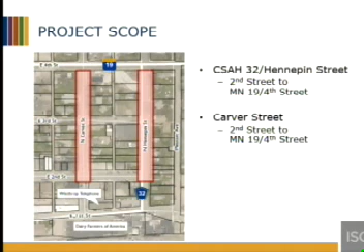So the scope of the project is essentially Hennepin Street, which is also State Aid Highway 32, from 2nd Street to Minnesota State Highway 19, which is also 4th Street, and Carver Street between the same two streets, from 2nd Street to 4th Street.

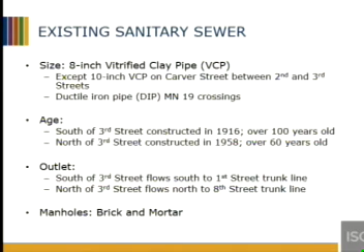The existing sanitary sewer is all 8-inch vitrified clay pipe, or VCP, except for one block which is 10-inch VCP. The existing crossings of Highway 19 are ductile iron pipe. It's split into two different systems: the north half, north of 3rd Street, is over 60 years old and drains north to the 8th Street trunk line. The area south of 3rd Street is over 100 years old and flows down south to the 1st Street trunk line. The existing manholes are all brick and mortar construction.

The city did have televising of the sanitary sewer completed in 2014 and 2015, mainly for two reasons: to identify sources of inflow and infiltration. Inflow is clear water entering the system through a direct connection, such as a perimeter tile or a sump pump going directly to the sanitary sewer. Infiltration is groundwater seeping in through cracks, leaky manholes, or things of that nature.

The idea is that they want to find out where those clear water sources are coming from, because they increase demand on both the system of pipes itself and the treatment facility. In addition to identifying those sources, they also wanted to identify any defects in the pipe that might cause failure in the system at some point.

For Hennepin Street, the worst defects found were unlikely to fail for at least 20 years. For Carver Street, there was one defect that inspectors felt might fail within 5 years, two defects that may fail within 10 to 20 years, and the remaining were unlikely to fail for at least 20 years.

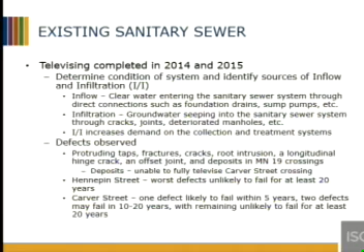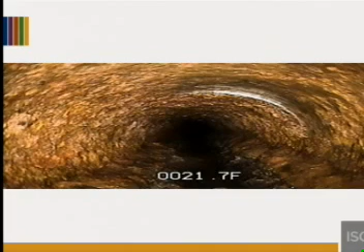There's a list of some of the defects that were observed, mainly cracking, and then some heavy deposits in the Minnesota 19 crossings on Highway 19. It's probably tough to see, but they were so bad that they couldn't televise one of the crossings because they couldn't get their camera physically through there, and for the other one they had to go from both directions, and were barely able to televise that section.

There's a picture of one of the worst cracks - that's the crack they believe could possibly fail within 5 years.

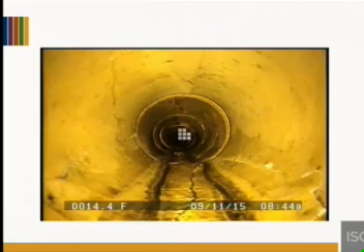The existing water main ranges from 4 to 6 inches in size and is believed to be ductile or cast iron pipe. We did not have any record showing how old the pipe was, but it's likely similar in age to that sanitary sewer. The 6-inch mains do meet current fire protection standards, however the 4-inch mains do not. Although the 6-inch mains do meet current standards, typically 8-inch mains are installed in a lot of cases due to minimum residual pressure requirements.

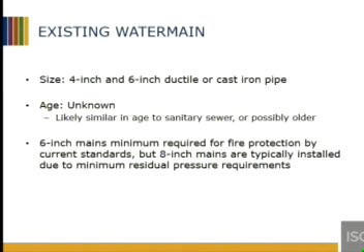In regards to storm sewer, there's not really a whole lot of storm sewer on this site. It's mainly in 3 different intersections. For CSAH 32 and Hennepin Street on the north end near Highway 19, there's 2 catch basins that drain directly east to the county ditch. Then there's 3 catch basins in the intersection of 2nd Street and Hennepin Street, and those drain south to 1st Street and then east to the ditch.

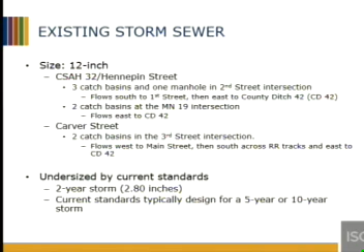In Carver Street, there's 2 catch basins at the 3rd Street intersection, and those drain west to the Main Street storm sewer south across the tracks, and then eventually end up in County Ditch 42. We did some preliminary calculations, and it's believed they're only sized to handle a 2-year storm, about a 2.8-inch storm. Current design standards are cities typically design for a 5-year or 10-year storm. On recent projects, the city of Winthrop has designed for a 10-year storm.

The existing streets: CSAH 32 or Hennepin Street is 33 feet wide, and Carver Street is 42 feet wide, with conditions ranging from fair to good. The streets aren't in super terrible shape. They have concrete curb and gutter on both sides, with condition ranging from fair to good, and similarly sidewalk on both sides, with condition ranging from very poor to good. There is some damage in some areas caused by tree roots and things like that.

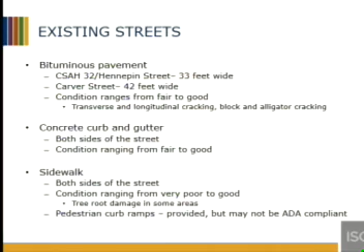There are pedestrian ramps at the intersections, but some - we didn't survey them - appear to possibly be out of compliance with ADA requirements. So there's an example of that sidewalk that would be in very poor condition.

So proposed improvements essentially include all the utilities: sanitary sewer, storm sewer, and water main, full street reconstruction including curb, gutter, sidewalk, and apron reconstruction as necessary, and then subsurface drainage construction.

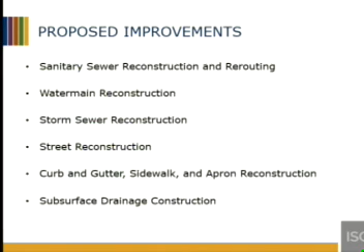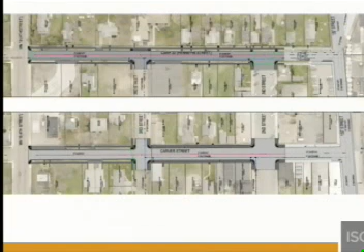This is just a copy of what you have in the packet that we provided, and if you didn't get one, there's additional copies here at the entryway. Basically, the red lines on the plan would be the proposed sanitary lines, the blue lines would be proposed water main, and the green lines would be proposed storm.

For sanitary sewer improvements, we are proposing to replace all the pipes with 8-inch PVC piping. As I mentioned earlier, there's one block that is 10-inch, but it has a very limited service area, so we feel that 8-inch size would be adequate there.

Additionally, we're proposing to reroute the sanitary sewer that's crossing Highway 19, directing that block to the south, essentially to eliminate those Highway 19 crossings. And then replacement of all those brick and mortar structures with precast concrete, and replacement of the sanitary services to the right of way.

In addition to that, we recommend that the city televise the remaining section of the private services, basically from the right of way to the residents, to make sure there's no perimeter tile or significant sources of inflow and infiltration that would be out of compliance with city ordinance.

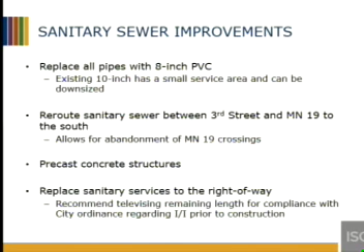Some things we considered with the sanitary sewer improvements - many of you may not recall, but we did a feasibility study for the city for some improvements on First Street. That was tabled because DFA had mentioned there's possibly some plans for expansion, and if that expansion were to take place, it might require some rerouting of those utilities down in the First Street area.

If these improvements were done in order to accommodate a reroute of the utilities, if that expansion takes place, the manhole at the intersection of Carver Street and 2nd Street would likely have to be replaced at that time. Otherwise, essentially all the other improvements we'd be proposing as part of this project would remain untouched.

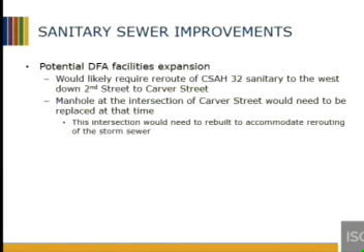For water main improvements, we're proposing to replace all the existing water main with 8-inch PVC. That would bring the existing 4-inch up to current standards. We'd include new hydrants and valves, and similar to the sanitary sewer, we'd replace the water services up to the right of way, including the curb stops.

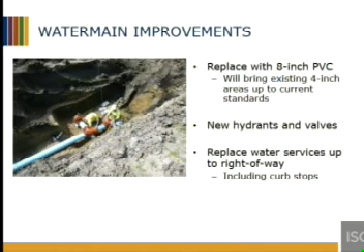For storm sewer improvements, we're proposing to replace the existing storm sewer with 12-inch storm sewer. We're thinking we can hopefully get a little more grade out of it to bring it up to that 10-year design storm, but we won't know for sure until we get the topographic survey completed. Even being at the very upstream end of their respective storm sewer segments, if they're designed to a 10-year storm and the pipes downstream are only to a 2-year storm, you might not see those drainage benefits until the downstream storm sewer is upsized as well.

The plan also includes subdrain construction, basically a 6-inch perforated PVC pipe placed behind the curb. That helps keep moisture out of the street section to prolong the life of the street. In addition, 4-inch service stubs would be provided for each property, used for a sump pump outlet, so residents along those streets would be able to connect their sump pumps directly to that subdrain to keep it out of the sanitary sewer.

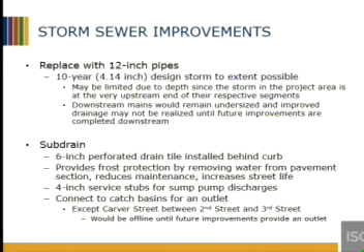There are some considerations here with the storm sewer improvements for a potential DFA expansion. We would essentially reconfigure the layout of the intersection of 2nd Street and CSAH 32 by adding a manhole on 2nd Street and reconfiguring that layout. If that expansion were to occur and those utilities had to be rerouted to the west, we could tie into that new manhole without having to completely rip up that whole intersection and redo the storm sewer at that time.

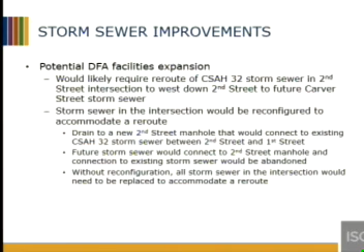For street improvements, being that it is a State Aid Highway, CSAH 32 and Hennepin Street would be designed to a 10-ton design. We've also included in this feasibility study a 7-ton design for Carver Street. Basically that means Hennepin Street would just have a slightly thicker section - probably heavier sand subbase, a bit more class 5, and about 1 inch more bituminous pavement. In addition, new curb and gutter, aprons, and sidewalks will be included in the street improvements.

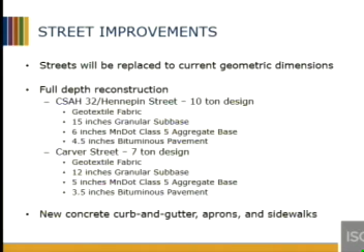Some additional considerations: environmental review. We did not conduct a full environmental review, but we did a cursory review looking at the MPCA What's in My Neighborhood website application. That showed the Winthrop C-Store was documented as a leak site back in 1990, but it received site closure in 1993. That doesn't mean all contaminated soils were removed - just that any remaining material didn't present a health hazard. So there's potential you might run into some contaminated soils, but since it received site closure, we did not include any contaminated soil removal costs in the estimates.

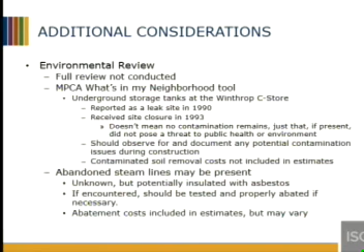Additionally, there are some abandoned steam lines that we've been told may be present in the area. We're not sure if they're insulated with asbestos, but if they were, we did include some abatement costs in our cost estimates.

There are some large trees along the streets that may require removal or trimming. Some of those trees are causing damage to the sidewalk and, in some areas, the curb. Given the narrow boulevards, there's a fair likelihood that a fair amount of trees would need to be removed.

There are some private utilities within the streets, including telephone, gas, and things of that nature, that might need to be relocated. In regards to street lighting, we assume they would be replaced. However, the city may want to decide what type of style they want to use, maybe a certain kind in the residential areas and a different kind downtown. That might affect the cost, I guess.

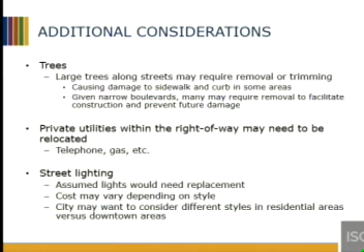In addition to looking at the existing and proposed, we did consider some alternatives, and the first of which would just be do nothing, leave it as is. In regards to the sanitary sewer, that would essentially mean none of the defects seen in the televised reports would be repaired.

The one was expected to possibly fail within 5 years, and that was back in 2015, so we're kind of getting to that point now. It's over 100 years old for half the project area, and over 60 years old in the other half. The do-nothing alternative would also not allow for abandonment of those heavily deposited Minnesota 19 crossings.

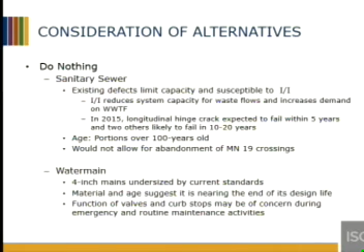With regards to the water main, do nothing would essentially leave it as is, and those 4-inch mains would continue to be undersized by current standards. Given the assumed age, it's probably nearing the end of its design life, which leads to concerns about the function of valves and curb stops during emergency or routine maintenance activities.

The storm sewer is not in terrible shape, but it is undersized by current standards, so that would remain the same under the do-nothing alternative. The streets, as I mentioned before, are in general fairly good condition, but if utility excavations were done to replace utilities, essentially the whole street would need to be replaced.

The sidewalks are in rough shape in some spots, and the pedestrian curb ramps may not meet current ADA requirements. From a cost-effectiveness standpoint, it's generally more cost effective to do all your utilities at once versus separately from a scheduled street project, since you'd have redundant mobilization costs and possibly redundant street repair costs.

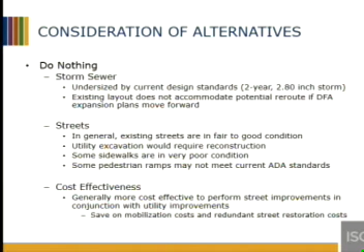Another alternative we considered was rehabilitation. There are some things in the sanitary sewer that would have to be fixed before you could do a lining project, and again it would not allow for abandonment of the Minnesota 19 crossings. In regards to the other utilities in the streets, it's really kind of the same as the do-nothing alternative.

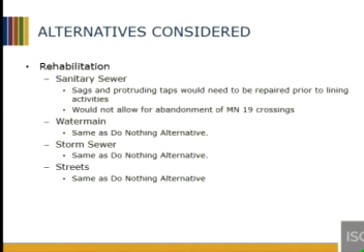The other alternative I briefly mentioned is abandonment of the Minnesota 19 crossings and rerouting all that sanitary sewer to the south. There are heavy deposits in those existing crossings, and eliminating them allows the city to be proactive rather than reactive to when MnDOT wants to do their Highway 19 improvement project, which isn't on the schedule as far as I'm aware, for a 5-year or 10-year plan.

For example, if there was a failure outside of when MnDOT did their project, the city might have to go in and tear it up, and then it might get torn up again when MnDOT comes through and does their project. So it helps avoid some redundant street improvement costs there.

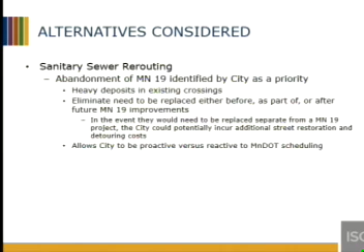Moving into the design phase of the project, we would recommend that the city perform a geotechnical evaluation, which would basically be some soil borings, and that company would provide pavement recommendations and let us know if there are any unsuitable soils there for utility foundations.

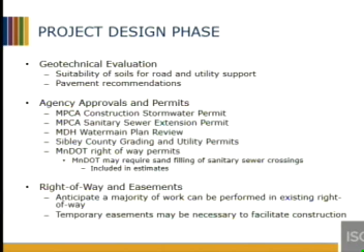There are various permits that would be required, including county and MnDOT permits, and MPCA and Minnesota Department of Health permits. We believe the project could take place in existing right-of-way, but it's possible there might need to be some temporary easements in order to facilitate construction.

One other thing that would have to be considered is essentially phasing of the project. One thing that's always a concern during these types of projects is maintaining access for the businesses and the homes. The scope of this project, I think, is well suited for this, because everybody, for the most part, has alley access, or they have access up Pleasant Avenue, so there isn't a huge concern with maintaining access to residents, homes, or businesses.

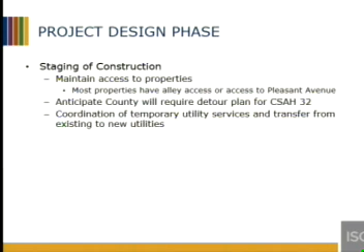In regards to funding, we anticipate the project will be funded through a bond issuance, which will be paid back through property taxes, utility funds, and special assessments. The special assessments, if they're used, would have to follow the requirements of Minnesota Statute 429, for which the preparation of the feasibility report in this hearing is one of the first steps.

In addition, being that CSAH 32 and Hennepin Street are the same thing, the Sibley County Municipal Construction Cost Participation Policy for state aid highways and county roads applies - that's the county policy on cost participation for state aid projects. Using that policy, we estimate the county would contribute, depending on fund availability, a little over $334,000.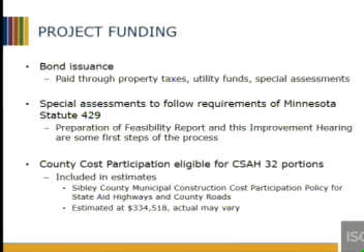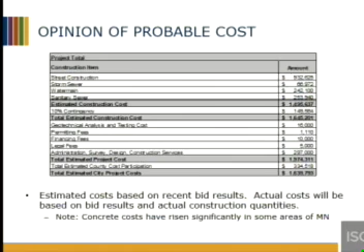Project schedule - this is a breakdown of where we go from here and where we've been. Right now we're at the public hearing on improvement. The next steps would be for the council to pass a resolution ordering the preparation of plans and specifications, and then from there approve the plans, approve them for bid, advertise for bid, and award a contract. Construction would be in May 2020 with substantial completion that fall, and they'd come back the following spring to do the final lift paving, if everything moves forward, depending on the bids and if the city decides to move forward.

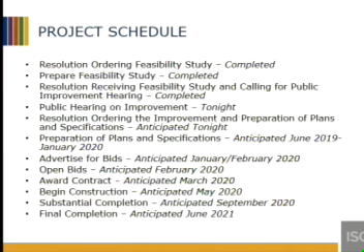Getting on to the special assessments, we did do a preliminary calculation as part of the feasibility study, included in the handout. They were based on city guidance and past practices on similar projects - basically 25% of the total street costs would be assessed to adjacent landowners, with utilities paid for by their respective funds. The city calculates on a unit basis, meaning each frontage is given 1 unit, and each side frontage a half unit, with the exception of the Evangelical Lutheran property with the church and home, which was calculated as having 2 frontage units because of its long length. The frontage is based on the address side of the property, and this methodology is consistent with recent street utility projects in the city.

So with that 25% of the total street cost, the total amount to be assessed comes out to about $310,674. That's an estimate, dependent on bid prices - if bids came in better, that number could potentially go down.

Now, the assessment policy - as I mentioned, the county may contribute towards the cost of this project. The city policy allows outside funds to be used first towards the city portion of the project versus the assessed amount, but the city may elect to use some or all of that county cost participation to help bring down those assessments. That's a decision they can make at a later date once they know how much and if funds are available from the county. We would estimate these assessments could be added to the property taxes in 2021 if the project moves forward with the schedule provided.

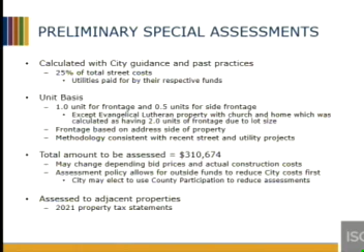The term and interest rate of the bond would be dependent upon availability - could be 15 to 20 years at an interest rate anywhere from 3 to 5%. In some cases, assessments can be deferred if you're 65 years of age or older, or retired by virtue of a permanent and total disability, or if the owner is a member of the National Guard or other military reserve and is ordered to active military service.

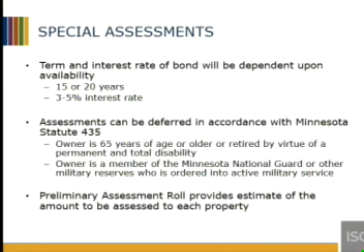As I mentioned, there is a preliminary assessment roll that was provided with the handouts, and it's probably pretty hard to read on the screen, but at this time I'll open it up for any questions anybody might have.

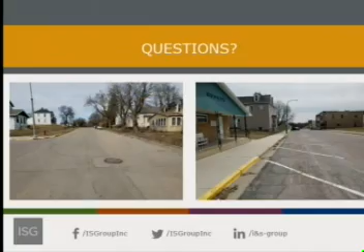Okay, if there are no more questions... there is a resolution approving an amended... well, we aren't even moving on that yet. Bump one over, yeah. Improvement hearing, yeah. So if there's no other questions, we'll close the hearing. Okay.

The next thing on our agenda is the resolution approving an amended and restated intercreditor agreement with RS Fiber. Did someone want to come up and talk? What we'll do is, if anyone wants to make a comment after Jake is done, we'll go with a 2-minute comment period for anyone. Do you want to swap these two?

Get Brian out of here. Oh, you know what, could you just give us a second? Yeah, Dale brought up a good point. Let's take care of the resolution ordering improvements so that Brian can get out of here, and if anybody else has questions, sorry. No, it's a good point.

So there is a resolution ordering improvements for the 2020 project, to go ahead with that or move forward. Is there a motion? Mr. Mayor, I move we approve and go ahead and proceed. Okay, there's a motion made. Is there a second? Second. Seconded by Pete. Is there any further discussion? If not, we'll proceed to vote. All those in favor say aye. Aye. All those opposed, same sign. Motion carries. Thank you. All right, Jake, Kevin?